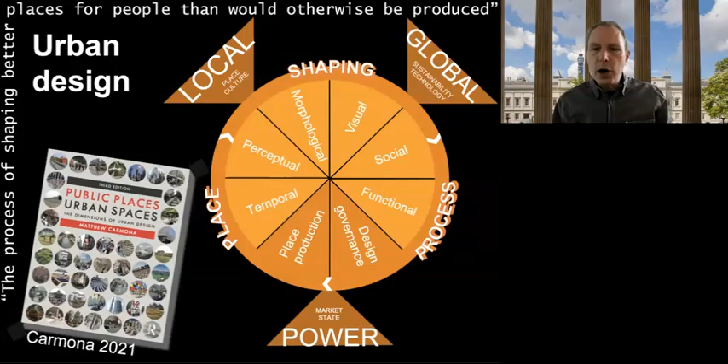Around its edge, the diagram also reflects the fact that urban design, wherever we practice it, is influenced by three critical contexts. First, how power is wielded and the balance between market and state. Second, the nature of the local context as defined by place and culture, and how that dictates both what we see and how we use the environment around us. Third, the global context of sustainability and technology, and how patterns of development locally ultimately impact globally.

It's this final context that I'm going to focus on today, and in particular, what we mean by sustainable urban design.

While quite a few of the examples I'll use to illustrate this talk are drawn from London and the UK, where I live and work, I'd suggest that the principles I'm discussing today pretty much apply wherever you live. In the book, they inform and infuse the 8 dimensions of urban design that are the core of the book and the centre of the diagram. And of course, there is much more detail as well.

Let's start today with the local. Ultimately, however we deal with the local, the aim should be to optimize its quality and potential, and to reduce its impact on the larger environment. In other words, the impact of the inner spheres on the outer spheres in this image, and ultimately on the global sphere.

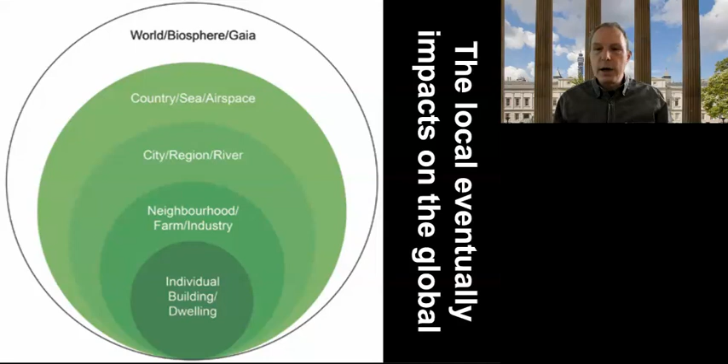Arguably, this interrelationship of spatial scales is nothing new, as the relationships between town and country in Ebenezer Howard's famous 3 magnets diagram suggest. And they, in turn, echo the triple bottom line of sustainability, namely environment, economy, and society.

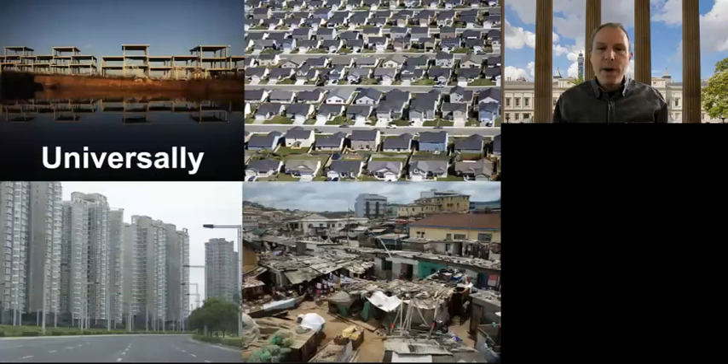Although one would have to say that still the environment consistently comes last in many of our development decisions, as local modes of development remain unsustainable pretty much wherever we live around the globe.

Now, faced with such issues, the temptation may be to blame urbanization. The economist Edward Glaeser, in his book Triumph of the City, quotes Mahatma Gandhi, who said, 'The true India is to be found not in its few cities, but in its 700,000 villages.' Glaeser goes on to say the great man got it wrong, as today India depends almost entirely on its cities for its development, reflecting the near perfect correlation between urbanization and prosperity across nations, and the very strong correlation between life satisfaction and the share of population living in urban areas.

Although sometimes that might be hard to believe when faced with the sort of grinding poverty of some city dwellers, such as seen here in the slums of New Delhi.

The answer to sustainability must ultimately, however, be found in our cities. They represent just 2% of the Earth's surface, but house 50% of the human population, using 80% of the resources. Urban design has a vital part to play in how cities are shaped, and therefore in finding solutions to these challenges.

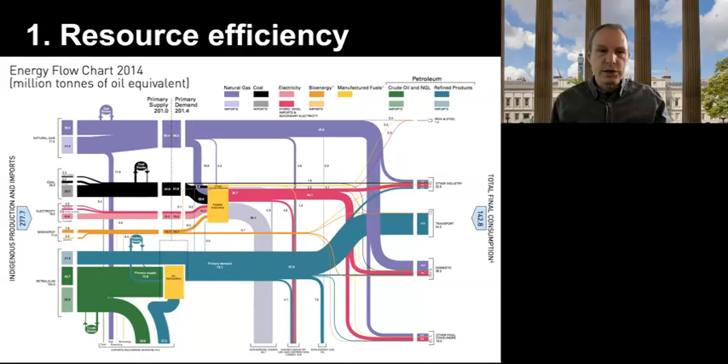In the UK, renewables account for approaching 45% of the electricity component of energy production. And that's energy production, not total energy, with a target to move in the UK to 100% by 2035. Other countries have similar targets, and one might argue that they don't go nearly far enough.

To get to them, switching to renewable sources of energy will be key, both passive and active. Therefore, one might say it's a bit of a no-brainer. These include well-established and deliverable technologies such as solar, wind, and geothermal. These sorts of technologies are very well understood and very deliverable, although switching to them is likely to be expensive in the short run, and of course has aesthetic consequences as well.

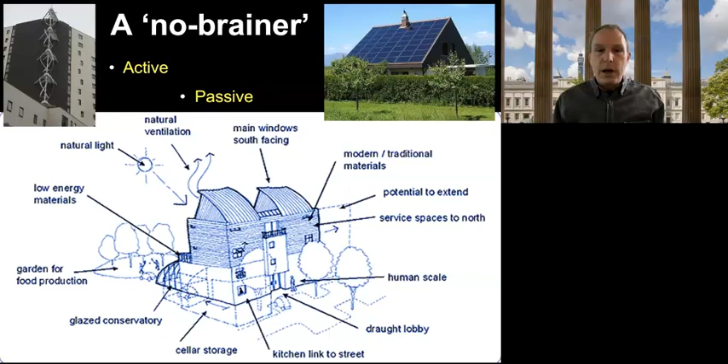Poundbury, for example, a well-known development in the UK, one of Prince Charles's pet developments, in this case on the edge of Dorchester, has very high environmental credentials, but doesn't allow roof-based solar panels simply for aesthetic reasons, which one might argue is perhaps a little bit short-sighted.

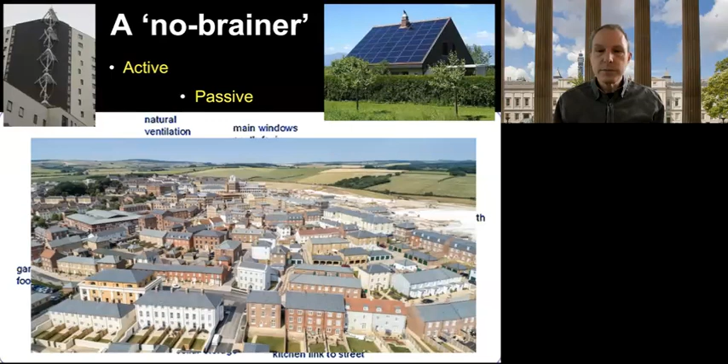The London Plan argues that 78% of the city's greenhouse gas emissions come from London's homes and workplaces, and it envisages a zero carbon city by 2030, much to be achieved through on-site carbon reduction, through these sorts of technologies that I've been talking about.

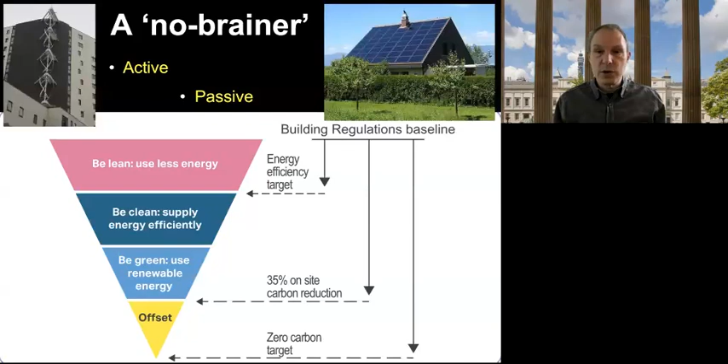But energy isn't the only sort of resource that we use. In much of the southeast of England, for example, climate change projections envisage a not very distant future in which we will face severe water stress, and those pressures on water are creeping to other parts of the UK as well, to the west and to the north. The UK is certainly not alone in this regard. Many countries are facing a future where we will be increasingly under water stress.

Too often, however, the discussion of sustainable urban design stops at this point, following consideration of energy and some other resources such as water. There's a sense that there is perhaps a bit of a technological tyranny, where the answers to unsustainable living are seen simply as engineering problems to be addressed by new technology.

For example, in the image here, you see a so-called sustainable supermarket that was designed and developed some time ago in Greenwich in southeast London, where I live. You can see it has its wind turbines out the front. It's partly an earth-bermed structure. It uses natural light. But when they were developing it, nobody thought, or perhaps it wasn't really discussed, that 99% of its customers would come by car. So not really sustainable in any real sense. I'll come back to this example a little bit later on in the talk.

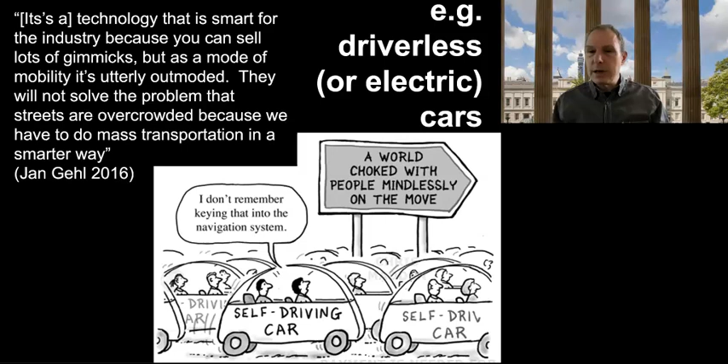Perhaps too often we're seduced by new technologies. One such technology is driverless cars that people have talked about as being the answer to issues of congestion with potential energy efficiency benefits. But Jan Gehl argues that driverless cars are a technology that he says are smart for the industry because they can sell lots of new gimmicks, lots of new cars, but which as a mode of mobility are utterly outmoded and essentially unsustainable.

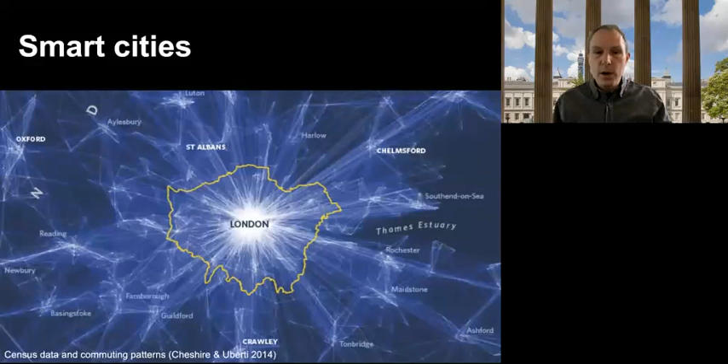This is not to say that new technology is itself unsustainable. We need to embrace technology and what it can offer us, not least to understand the city and the impacts of human beings on things like the flow of resources through urban areas. Using that knowledge in turn to better shape cities in the future and to enhance people's experience of using them will be key, not least through harnessing the sort of mini computer that we all carry around in our pockets.

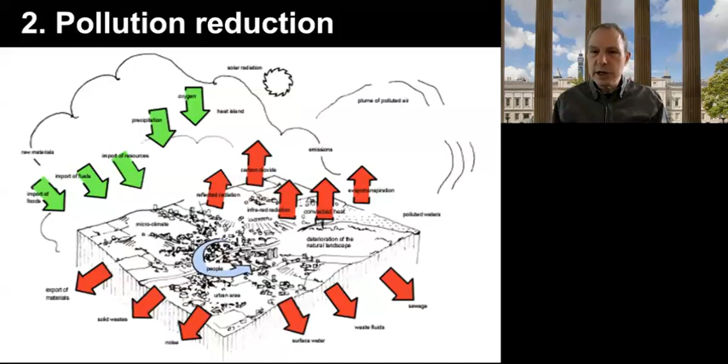Moving on, not only do we need to think about inputs, but also outputs in terms of waste from the urban system. Ian McHarg long ago argued that we should see cities as functioning ecosystems, distorted but nevertheless real.

Unfortunately, we have not been very good at that. For example, many of London's high streets, its main shopping streets, have concentrations of nitrogen oxide and particulates well above EU air quality objective levels, and in the past frequently 2 and sometimes 3 times safe levels. The Greater London Authority commissioned research in 2015 that suggested that pollution at that time contributed to over 9,000 premature deaths in London annually from a combination of long-term exposure to nitrogen dioxide and particulates.

Although London's new low emissions and now its ultra low emission zones are rapidly improving the situation. In fact, the ultra low emission zone, as I talk now, is just being expanded to cover the whole of the city, the whole of the Greater London area.

And of course, many cities globally are in a much worse situation than London, and sometimes in truly desperate positions as regards pollution, with problems extending to how we deal with rubbish, water, sewerage, fuel, food, construction materials, as well as air pollution, and so on and so forth.

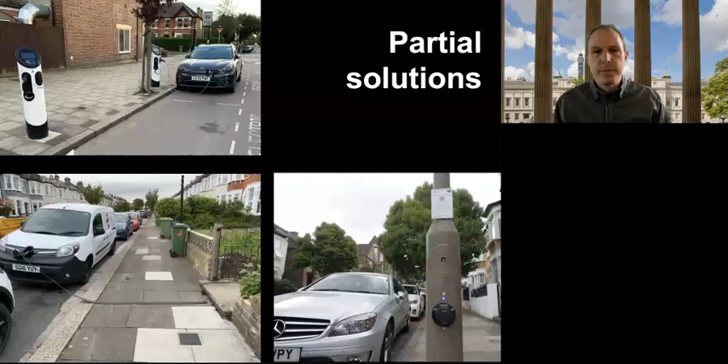Despite what Jan Gehl suggests, changing technologies, for example electric cars, can help us deal with some of these challenges in more or less intelligent ways, but are still only partial solutions. For example, electric cars can't deal with congestion, they can't deal with particulates from cars, or the carbon from electricity production, and the energy demands of the heavier battery-driven cars we're increasingly producing, all of which remain major issues going forward.

The aspiration should be to move from linear forms of urban metabolism to circular ones, where both inputs and outputs are reduced and more resources remain within the city.

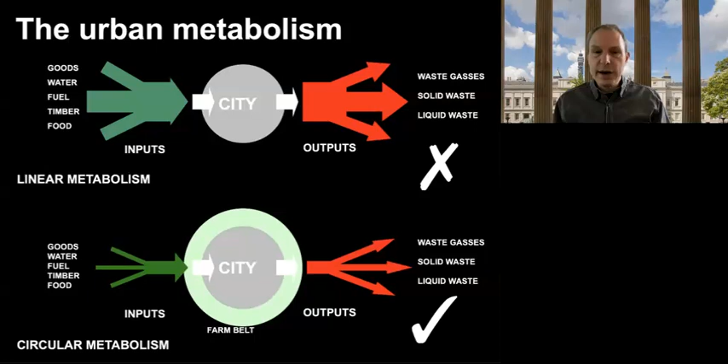The Ellen MacArthur Foundation suggests that this circular economy should be based on three principles, all heavily influenced ultimately by how we design places: eliminating waste and pollution, circulating products and materials, and regenerating nature.

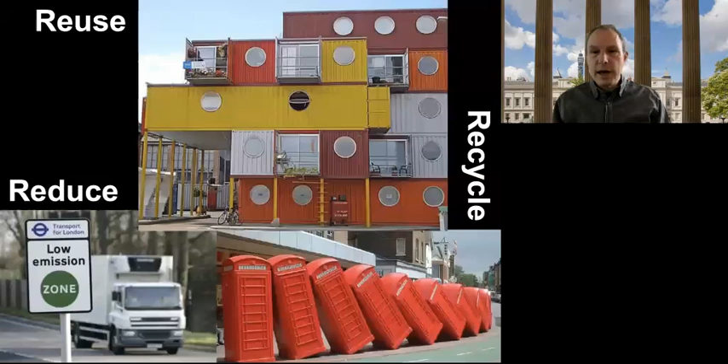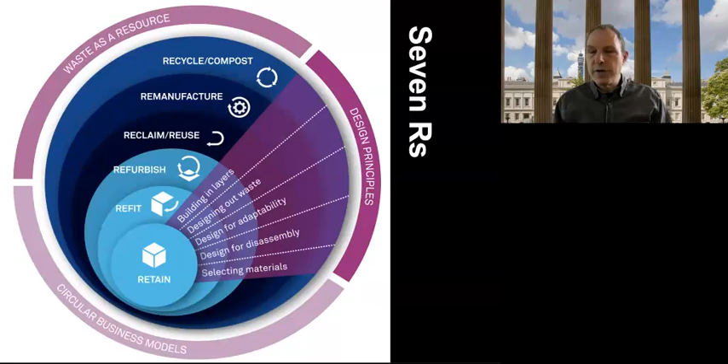The aspiration, of course, is that if we routinely adopt the classic three R's, a fourth R, removal of waste, should only be necessary as a last resort. But we're not there yet. And perhaps because of that, or maybe just a love of alliteration, others are adding more R's. David Cheshire, in the book Building Revolutions, gives us 7 R's, significantly adding refurbish and refit, which relates back to the idea of regenerating, including regenerating nature, such as the installation of pollinator street lamps across Liverpool here in the UK.

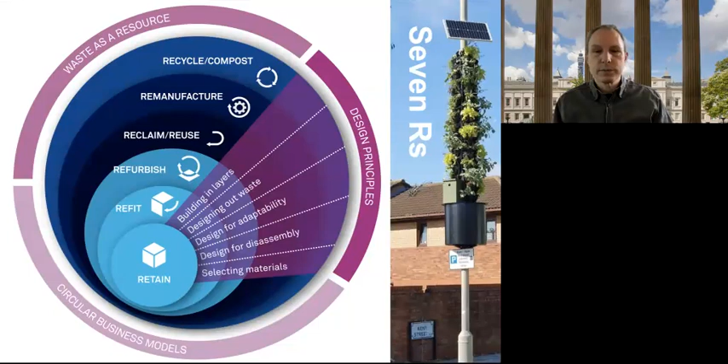Amsterdam goes even further. They actually define 10 R's, but I think you get the point.

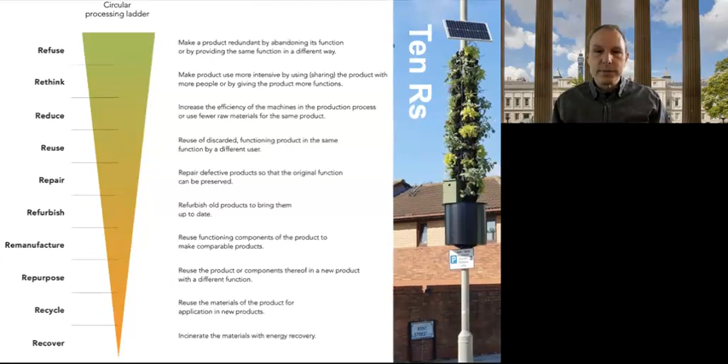Fundamentally, this is about moving to a different mindset across different urban scales, ultimately leading to a circular city.

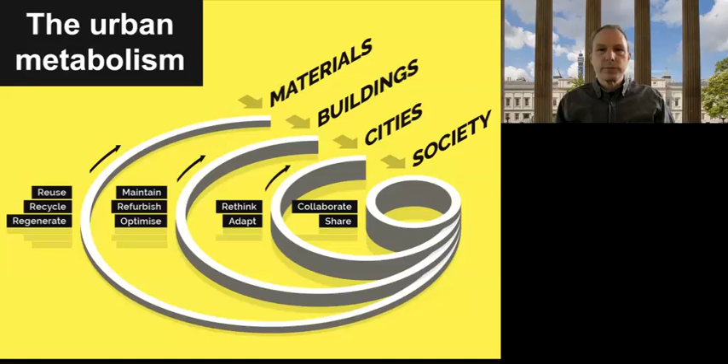A critical dimension of waste is that caused by the demolition of existing buildings. So let alone the rebuilding costs, it can take 40 years of energy efficiency measures to compensate for the embodied energy used in new build development.

15 years after it was built, the sustainable supermarket in Greenwich was demolished, in this case to make way for an IKEA store. Here today, gone tomorrow. The only thing that remains is the car park. None of this is sustainable and certainly not resilient in any sense.

We need instead to take pride in the buildings that we build today, and build them to last.

The old Royal Naval College in Greenwich, just a mile or so down the road from the site of that former sustainable supermarket, is a great case in point. These buildings were built in 1712, originally as a rather grand hospital and retirement home for injured merchant seamen. In 1873, the Royal Navy took them over and converted them into a college for training Royal Navy mariners, including, at one time, it even had its own little nuclear reactor for training submariners. In 1999, the Navy no longer needed it, and Greenwich University took it over along with the Trinity College of Music, and they're still there today.

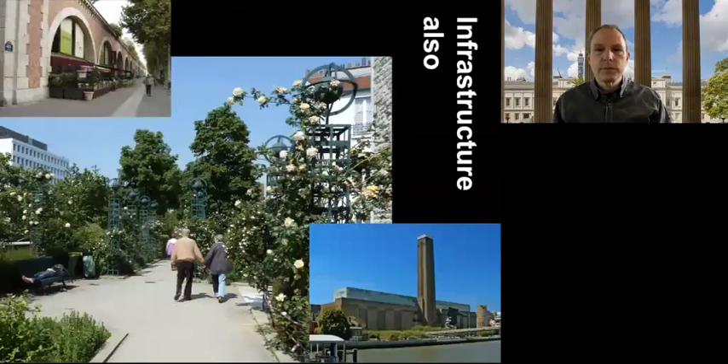Infrastructure should also be resilient and can sometimes be adapted for new uses when no longer viable in its original use. Promenade Plantée in Paris is the forerunner to the High Line in New York. It provides a great case in point of the reuse of a former railway to create a new linear park running through Paris. In London, Tate Modern is a former power station that is now used as an amazing art gallery. Repurposing infrastructure when we no longer need it for its original purpose.

Now, retaining and mixing the old with the new is part of the fourth consideration, diversity and choice, just as Jane Jacobs advised us 65 years ago. This is essentially an argument for a rich mix over sterile monoculture in all its guises. So we're talking here about mixing uses, mixing activities, mixing people, and mixing spaces of different types and buildings of different ages and times.

Criticism of sterile monoculture goes back to the early critiques of zoning by Jane Jacobs and others, and finds its latest incarnation in the 15-minute city.

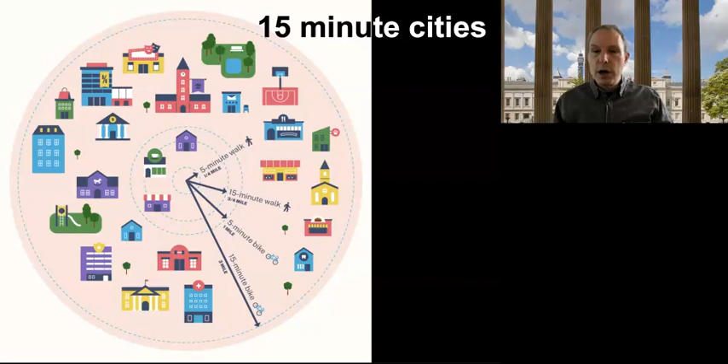Now, during the pandemic, when we were all forced to be at home much more and became very aware of the strengths or shortcomings of our home neighbourhoods, these ideas gained significant renewed traction. But as I say, they really go back to the early origins of urban design as a subject and the desire to live in perhaps a more diverse and mixed type of environment.

Following the pandemic, many cities have taken the opportunities to introduce low traffic neighbourhoods, typically on health grounds. But of course, allowing choice for some things, in this case, the choice to walk and cycle, or for children to play out in the street, inevitably means restricting other choices, in this case, the choice for people to drive through such a neighbourhood. And that can be controversial.

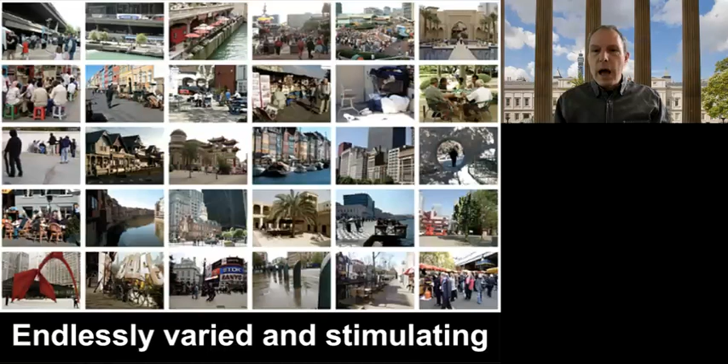Ultimately, urban areas should be endlessly varied and stimulating. And post-pandemic, it's these qualities that will ensure their future, including the future of sustainable, vibrant urban centres.

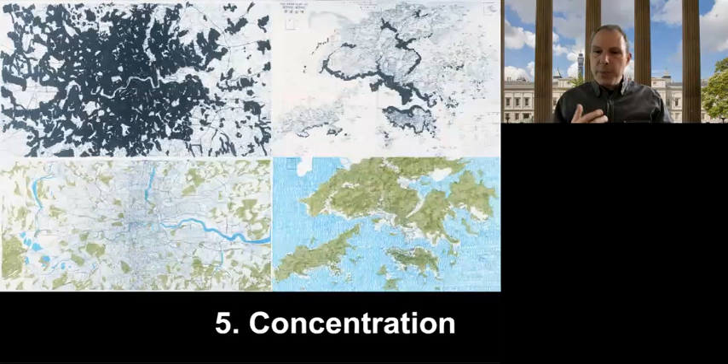Underpinning mix is the need for a concentration of people in places. But this is one of the most contentious of sustainable objectives here in Britain and in much of the Western world. If we look at London and Hong Kong, for example, they both have similar populations, about 8 million, but distribute their people very differently. The built-up area of Hong Kong could fit into London's parks. And this makes Hong Kong a very energy efficient city. But it also has significant livability implications.

And higher density is seen often very negatively in the West, contributing to the dominant sprawl model that we've tended to see, with cities spreading out rather than building more intensely.

Yet even in the West, our impact from person to person varies hugely. Edward Glaeser points out that if the environmental footprint of the average suburban home is a size 15 hiking boot, the environmental footprint of a New York apartment is a size 6 Jimmy Choo. Greater concentration of urban areas is key, as beyond a doubt it leads to less energy usage per head of population.

It also doesn't have to mean building high. Skyscrapers are, in fact, at least a third more energy hungry over the course of their lifespans than any other form of development.

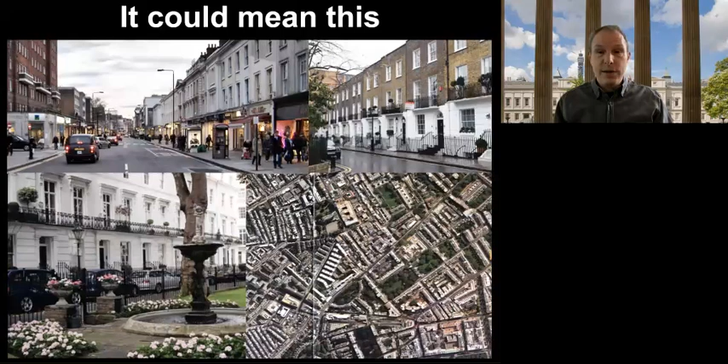It could mean this. Now this, in fact, is Chelsea in West London. The architect Terry Farrell has pointed out that the highest density and the highest house prices in London are in the same place, the borough of Kensington and Chelsea, along with, in fact, some of the largest areas of open green space in London, such as Kensington Gardens, and some of the loveliest green spaces, some of London's Georgian green squares.

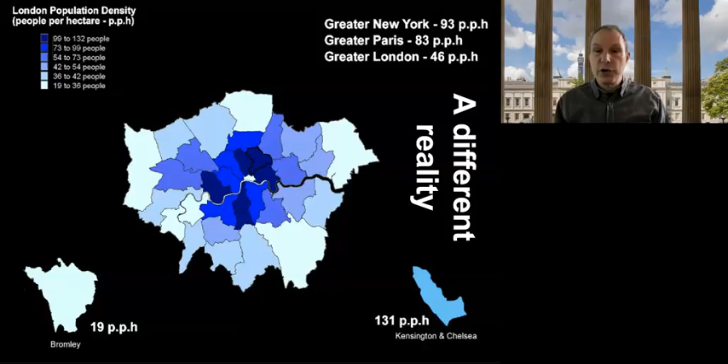A key dimension of what makes places such as Kensington and Chelsea so desirable are their distinctive historic streets, spaces, and architecture. In London, the proposed redevelopment of Covent Garden in the 1970s and the public outcry that followed changed attitudes to the vital importance of the historic built environment. Today, Covent Garden represents a valuable piece of London, economically, socially, and culturally, all generated out of its unique sense of place.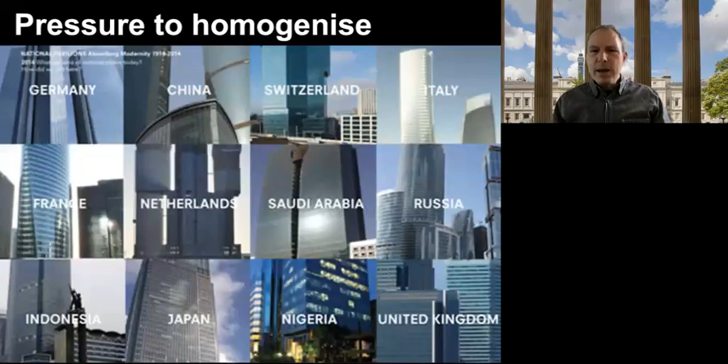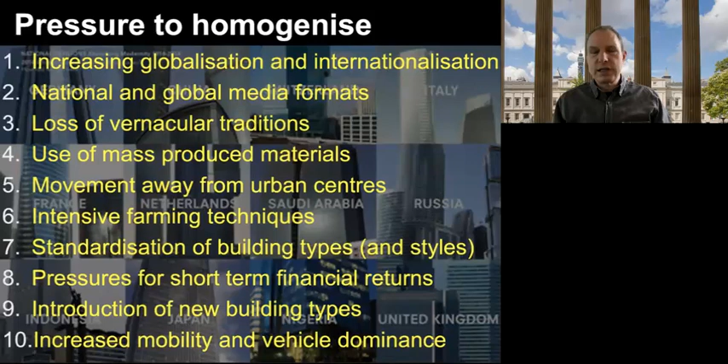But the pace of change has quickened, and many pressures today act to homogenise both the natural and the built environment. Much contemporary development is characterised by a blatant disregard for place and context, replaced instead by a primary concern for the individual piece of real estate or infrastructure.

We consistently break what Francis Tibbalds described as the golden rule, that places matter before buildings, or places matter most. Often there is little regard for history, despite the great scope to learn from the past.

George Bernard Shaw said, 'The reasonable man adapts himself to the world. The unreasonable man persists in adapting or trying to adapt the world to himself. Therefore,' he said, 'progress depends on the unreasonable man.'

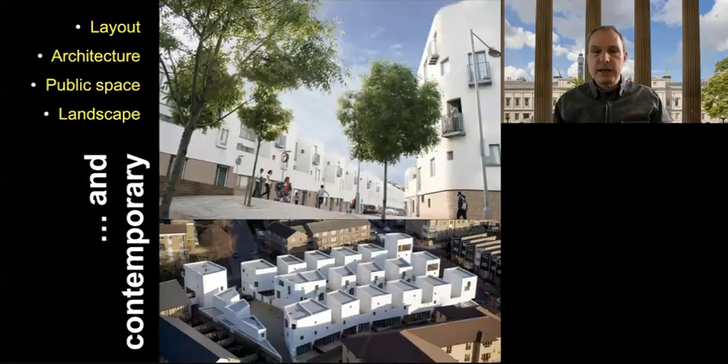Landscape, of course, plays a key role in supporting the biotic environment. Ken Yeang described four interconnecting infrastructure armatures as the critical dimensions of eco-master planning: grey, or infrastructure armature, red, or human armature, green, or biotic, and blue, or hydrological armature. Each, he argued, needs to be understood and manipulated through the act of design, but typically, he said, we tend to neglect the blue and the green through our focus on the red and the grey.

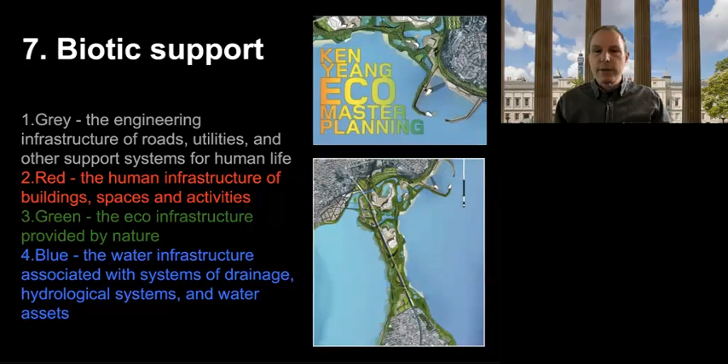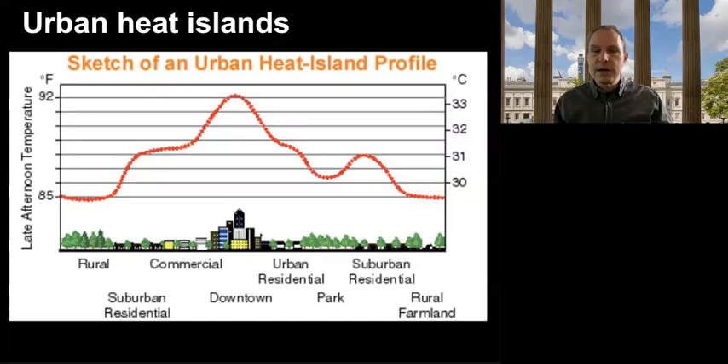The impacts are, of course, multiple, but one is that the build-up of hard surfaces in cities, on buildings and streets, is creating urban heat island effects. The accumulation of heat is further increased by traffic pollution and the heat released from waste, and also the impact of climate change, which means that in many of our urban areas, these effects are becoming worse.

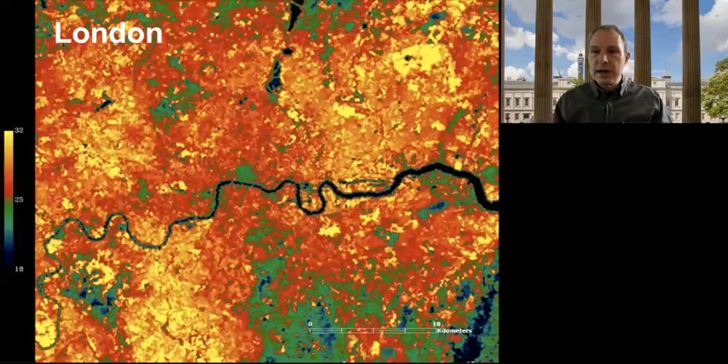In London, the difference between the suburbs and the centre can be as much as 6 degrees. Internationally, urban heat islands are often associated with poverty and can have dramatic health impacts on the least advantaged in society in particular.

The potential of greening to reduce such effects is well known, but we need to think more carefully about how we can integrate the green and the natural with the built and the human. It doesn't necessarily have to mean having goats living on our roofs, for example. Landscape should no longer be seen just as an afterthought. We should recognise its critical biotic as well as its critical aesthetic function in our cities.

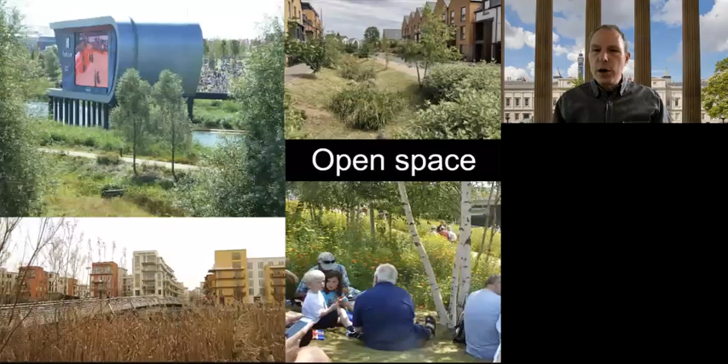Within urban and suburban contexts, the natural environment can deliver recreational opportunities for sport, place-based relaxation, wildlife habitats, places for capturing and recycling water, venues for events, spaces for the city to breathe and cool down, all with huge health and livability benefits for us all.

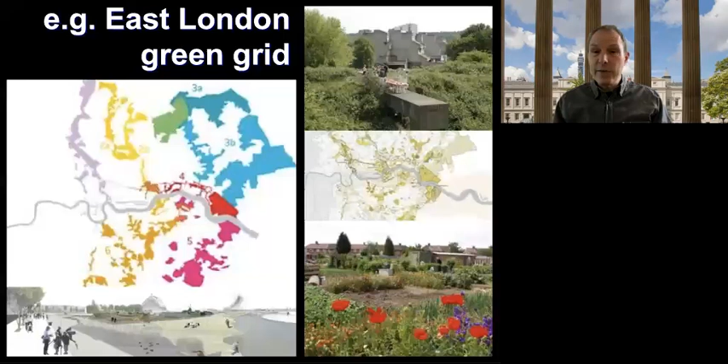Particularly if we can string together those individual pieces of green infrastructure in order to maximise their value for recreational amenity and wildlife.

I live in southeast London, quite a dense urban area, but also close to part of the East London green grid, which once you're in it allows you to walk for miles through a network of green spaces. This is something policy over many years has attempted to develop and extend, tying different pieces of green infrastructure together.

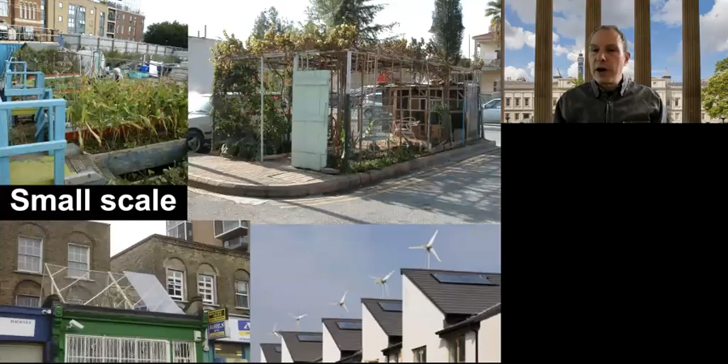The biotic environment also contributes decisively to a further goal, that of greater self-sufficiency. This can be on a large scale but might also be on a very small and local scale in urban areas, through generating more of our resources locally—energy, water, capturing water, but also generating food locally as well.

For example, in some of these images you can see chickens living on a rooftop in Dalston in North London, a very dense part of the city, or fruit and veg production in King's Cross, or vines being grown in a car park in the middle of Nicosia.

Rocky Park in Bethnal Green in East London offers an excellent example of converting an unloved swath of green grass into a much loved shared garden space, generating produce for the local community.

Finally, we need to recognise that none of what I've talked about so far will be possible without meeting human needs in terms of the basic well-being of the population. We need to bring people along with us in order to get buy-in to sustainable principles.

That means shaping places that meet all the other objectives of great urban design, those things covered by the dimensions at the centre of the diagram I began this talk with, and the subject of a whole series of other lectures in their own right. They include designing for equality, opportunity, human scale, legibility, visual richness, safety and security, health, accessibility, comfort, and so on and so forth.

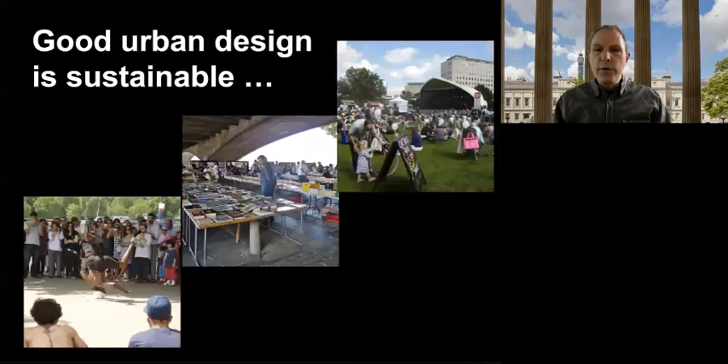All of which contributes to my core argument that good urban design is sustainable. This means a process of shaping better places for people than would otherwise be produced, because the default is too often unsustainable. So because it creates a local urban environment better able to meet human needs in a less resource-intensive manner, good urban design should be our starting point.